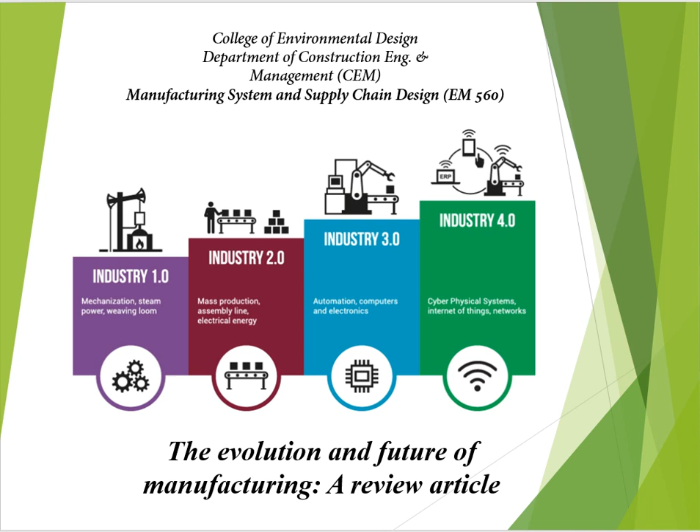Today I'm going to present a review article about the evolution and the future of manufacturing. This article is extracted from Journal of Manufacturing Systems, which was published and available online on 16th of April 2016.

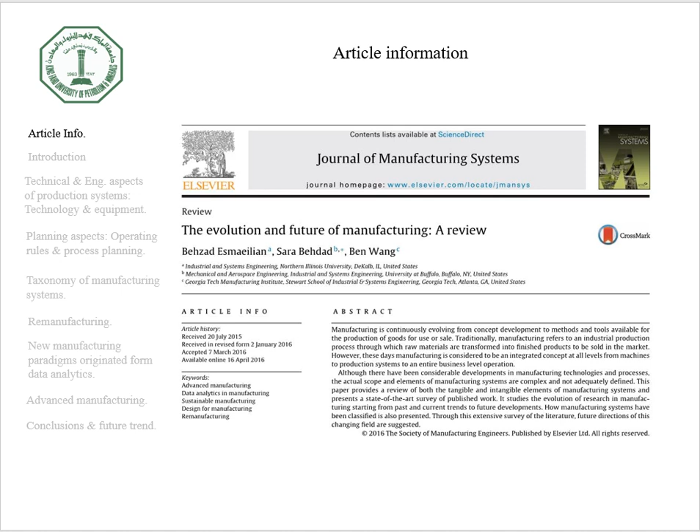As you can see in front of you, the abstract and the keywords for this article. This paper presents a holistic view of manufacturing by analyzing a broad range of publications covering myriad sub-areas and topics.

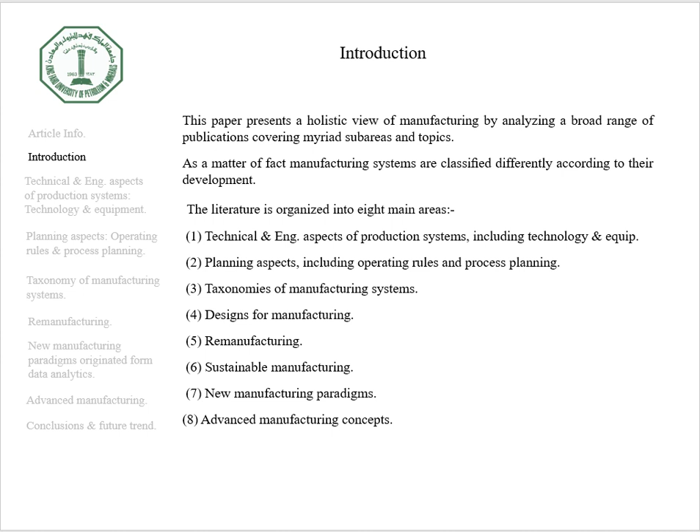This literature is organized into 8 main disciplines. The first discipline is technical and engineering aspects of production systems. The second is the planning aspect. Third, taxonomies of manufacturing systems. Fourth, designs for manufacturing. Fifth, remanufacturing. Then, sustainable manufacturing, new manufacturing paradigms. Lastly, but not the least, advanced manufacturing concepts.

Let's start with the technical and engineering aspects. From manufacturing processes, we have a variety of processes that can be applied to the materials, starting from casting, cutting, forming, and fabrication. Each technology will be applied to the material and to the metal based on its requirement and its desires and its serving functions.

A more comprehensive classification is provided, in which processes are classified into 6 subcategories: casting, machining and finishing, joining, sheet metal, polymer processing, and deformation processes.

We have joining technology, where several parts are joined to form a new part, such as welding and assembly. We have dividing technology, like sawing and disassembly. We have subtractive technology and material removal, such as machining operations and grinding.

We have transformative technology, in which a single work piece is transformed to another one without a change in mass - using heat treatment principles. Then we have additive technology, like for example rapid prototyping, die casting, and injection molding.

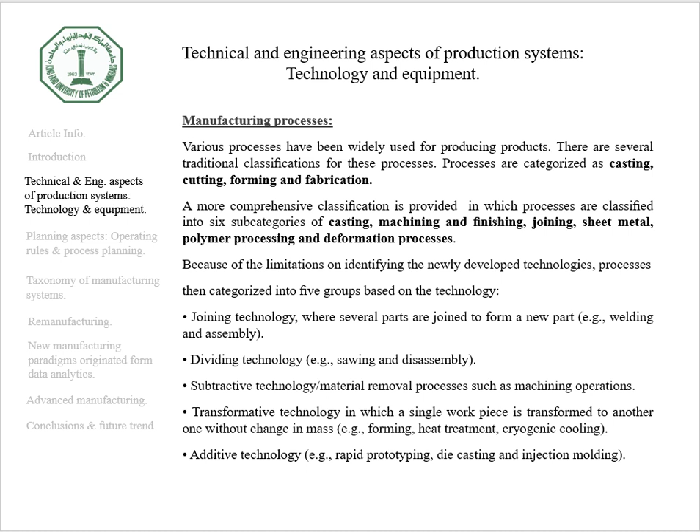From the industrial control systems - the ICS includes and comprises supervisory control and data acquisition (SCADA) system, distributed control system (DCS), small single control devices such as programmable logic controllers (PLCs), sensors, and actuators.

Although the ICS have little similarity to modern IT systems, ICS need different performance and reliability requirements than typical IT systems. So many researchers applied information security related to the ICS, which has also become a focal point. We are going to talk about one terminology, which is resilience.

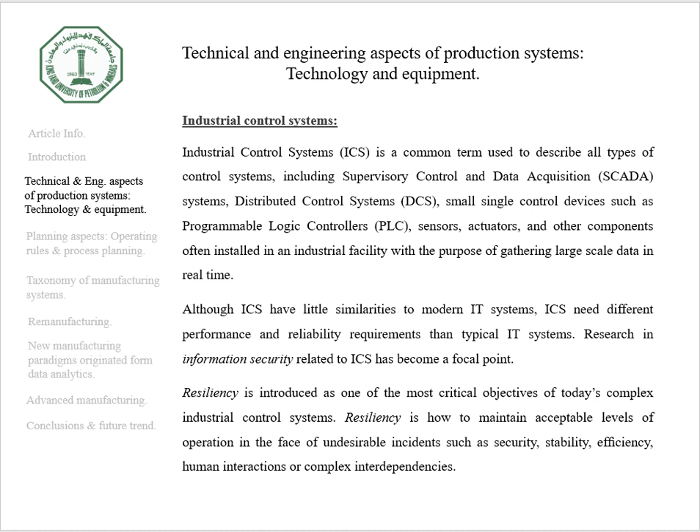Resiliency is introduced as one of the most critical objectives of today's complex industrial control systems. Resilience by its nature is how much a person can resist and overcome burdensome circumstances and survive them. So resilience is how to maintain acceptable levels of operation in the face of undesirable incidents like security, stability, efficiency, and human interactions.

For industrial robotics, we are going to present some features of robots in manufacturing applications. The features of the robots are the ability to quickly, repeatedly, and accurately perform operations, production flexibility, the ability to produce a large product variety, and to avoid the major 3Ds - dirty, dangerous, and difficult jobs - in many applications, such as welding, material handling, painting, and palletizing.

For the material handling system, we know that the cost of material handling consists of 15% to 70% of the total manufacturing cost of the product. And here it became a substantial subject to tackle and to focus on - how are we going to handle the materials, whether the raw materials or the finished goods?

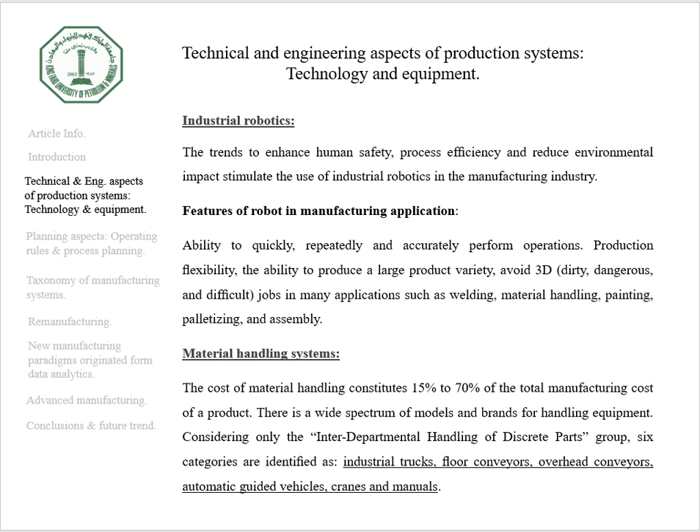So we have various technologies and methods to handle these materials, such as industrial trucks, floor conveyors, overhead conveyors, automatic guided vehicles, cranes, and manual handling.

For storage and warehouse management systems (WMS), we also have automated storage and retrieval systems, called ASRS. This was initiated in the late 1970s and its development continued over the years. ASRS is a typical application of automation technology in modern logistics.

Currently, there are joint applications for RFID, the radio frequency identification technology, and lean manufacturing, which can result in saving the total warehouse operation time by 87%.

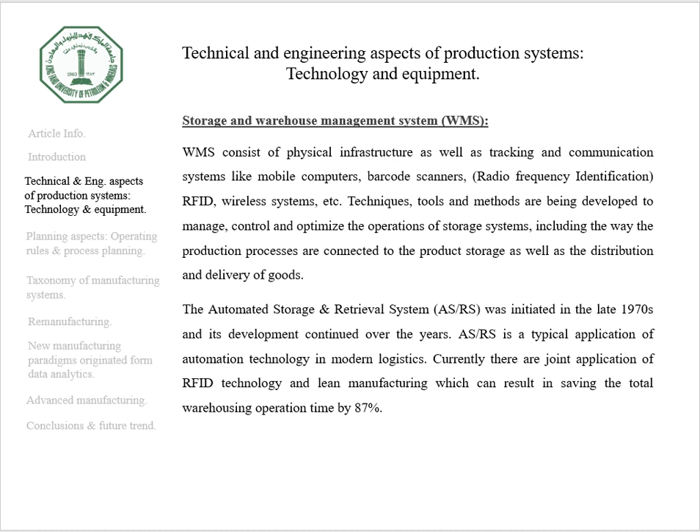The second aspect was the planning aspect. So the operating rules and process planning aspects of production systems are desired under the following main categories: production inventory, scheduling and shop floor assignment, and quality control.

Now let's talk about production inventory and resource planning. There are actually two challenges in this area. The first one is the uncertainty in demand, which all firms face in their work. The second thing is the variability in the manufacturing system.

Regarding the uncertainty in demand, simulation methods and so many applications and algorithms are used to expect or anticipate the demand in the future or coming years.

The second thing was the variability in the manufacturing system. So there are plenty of concepts in manufacturing systems, such as just-in-time (JIT), manufacturing resource planning (MRP2), enterprise resource planning (ERP), lean, and agile manufacturing systems. These systems are applied in manufacturing firms based on the nature of the business.

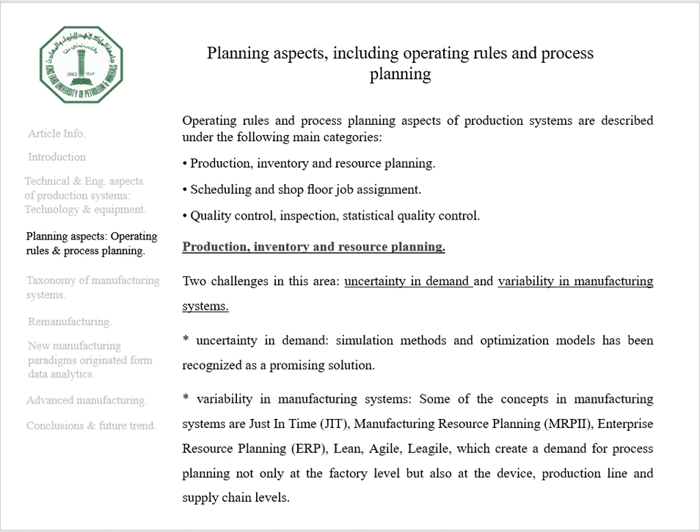For scheduling and shop floor assignments, we have sequencing of jobs and lot sizing. In sequencing of jobs, we have parallel machine scheduling (PMS) and flow shop scheduling (FSS).

Now, on the other side, we have lot sizing - the economic lot sizing and scheduling problems based on the continuous time model, and capacitated lot sizing based on discrete time models. The main purpose in lot sizing is to determine the lot size and sequence of the lots while minimizing setup and inventory costs.

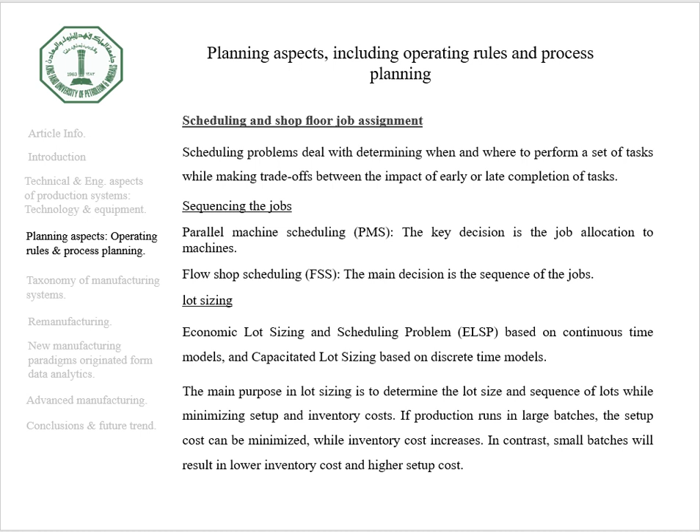Now, the third aspect is the taxonomy of manufacturing systems. In the taxonomy of manufacturing systems, we have the technology perspective and the production philosophy perspective.

From the technology perspective, the recent technologies nowadays adopted and followed by many manufacturing firms are CNC, the computerized numerical control machining, CAM, computer-aided manufacturing, and CIM, computer integrated manufacturing. From the production philosophy perspective, the manufacturing systems are recognized as lean manufacturing, agile manufacturing, and lean-agile.

I'm going here to elaborate to some extent the difference and to distinguish between lean manufacturing, agile manufacturing, and lean-agile. First, the lean manufacturing.

Lean manufacturing is concentrated on eliminating waste, non-value added activities, as much as possible, such as transportation, inventory, motion, and waiting time. So the main focus of lean manufacturing is to increase efficiency, minimize waste, and at the same time use the just-in-time strategy.

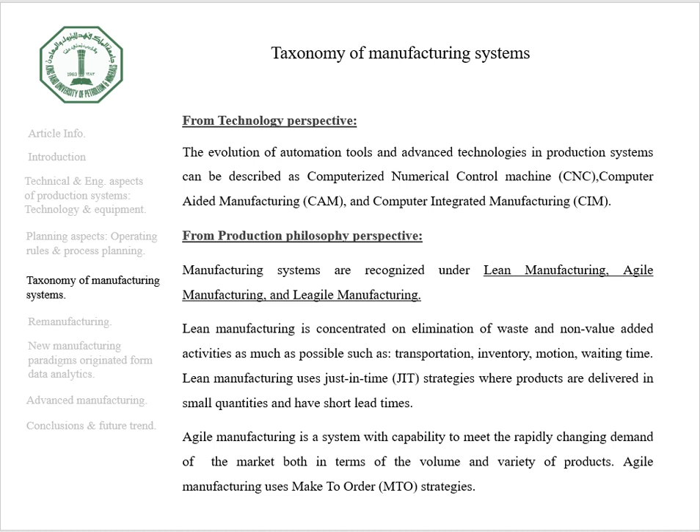Now, lean-agile is actually a hybrid system, or you can say a hybrid strategy. Some firms will start with lean manufacturing, and at some point they shift to be agile. We call this lean-agile.

But the point here is that the upstream, which is the producer, from the decoupling point, is forecast-driven at expected demand, in which it acts based on the lean concept. So the upstream will adopt lean manufacturing first.

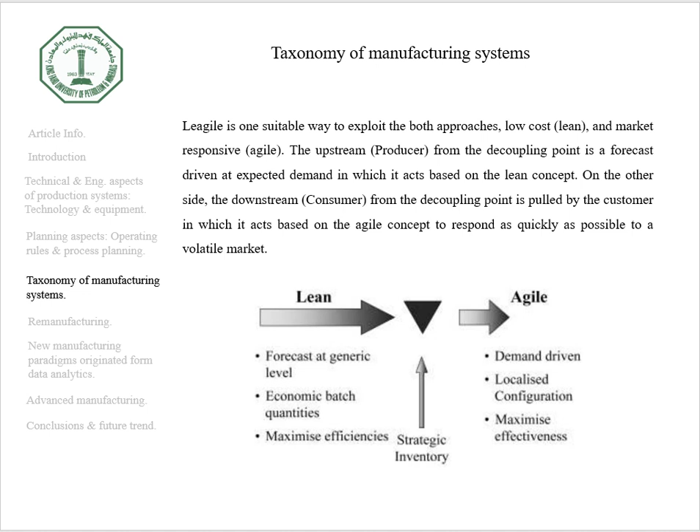Then, on the other hand, the downstream will be the consumer. The consumer will be agile. So the decoupling point here is pulled by the customer, in which it acts as an agile concept to respond as quickly as possible to the volatile market.

From the inventory and control perspective, we have also some strategies in production adopted by manufacturing firms, such as engineer-to-order up to make-to-stock.

Here we can see the responsiveness rate. It will be very low in case of engineer-to-order, but on the other side it will be high in customization. In contrast, for the make-to-stock strategy, the responsiveness rate is very high, while customization is very low. So you cannot customize your product in case of make-to-stock, because it will be available in the inventory and you just go and pick up your finished good or product.

While in engineer-to-order, you are going to have various and plenty of meetings and discussions between the customer and the manufacturer, because you are going to customize and custom-build your equipment or product.

Now, from production control strategies, we said we have a push system, a pull system, and a hybrid push-pull system. In the pull system, parts are pulled from the supplier based on actual demand, and it uses the just-in-time strategy, as we said before, where no inventory exists.

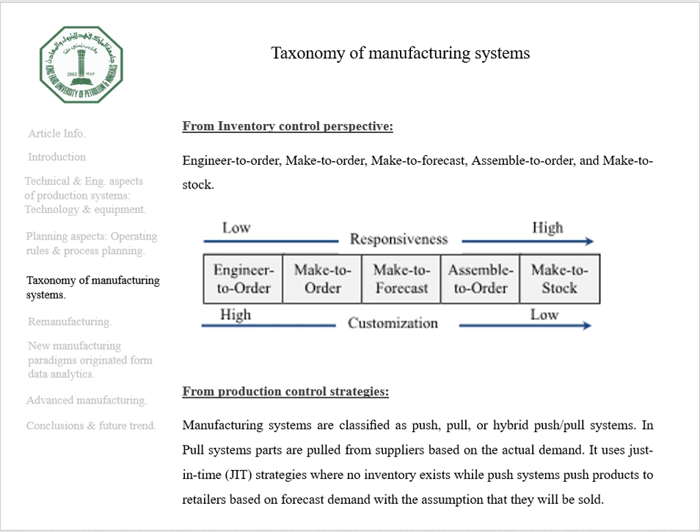Here I'm going to highlight some differences between economy of scale and economy of scope. Actually, the older strategy is economy of scale. Economy of scale refers to savings in cost due to the increase in output produced. So if I produce a high quantity, I'm going to incur lower cost.

Now, the relatively new strategy is economy of scope. The shift here from economy of scale to economy of scope is that you save cost and lower your production cost due to producing two or more distinct products. So you produce plenty of varied products in order to save and lower your cost.

Now, the cost advantage, as we said, for economy of scale, was because of volume, since you produce more quantities and thus incur lower cost. But the cost advantage in economy of scope is due to variety, because you have plenty of brands or types of products.

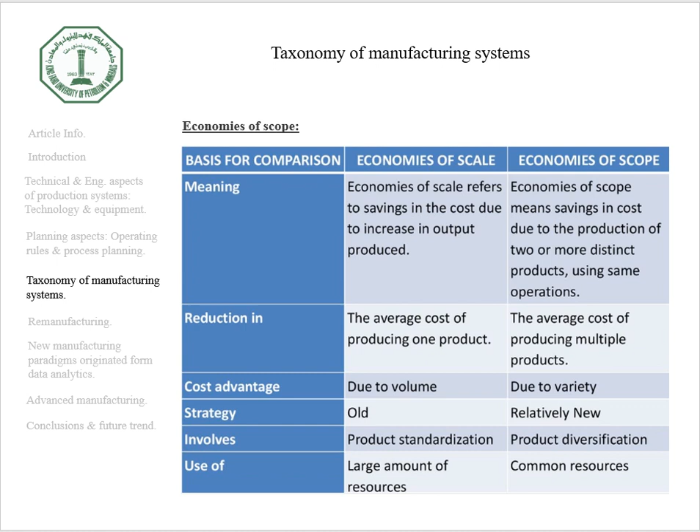Now for the remanufacturing, we can describe it as a process of restoring non-functioning discarded products to like-new performance. You take the expired or non-functioning product and do some modification on it in order to make it like new.

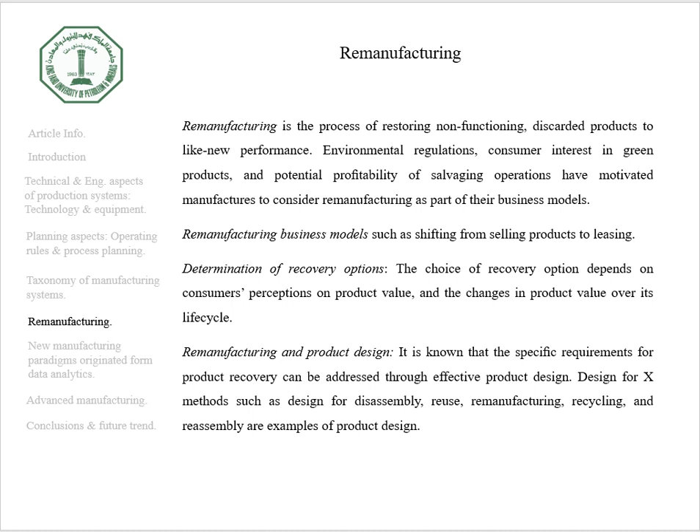In remanufacturing, environmental regulations, consumer interest in green products, and potential profitability of salvaging operations have motivated manufacturers to consider remanufacturing as part of their business models. Many manufacturers now consider remanufacturing due to environmental regulations, reducing waste, and consumer interest in green products—customers sometimes ask specifically for green products.

For the new manufacturing discipline, we have smart manufacturing and smart supply chain. There are plenty of articles about this topic. In summary, advanced manufacturing systems equipped with hundreds of sensors facilitate the collection of huge amounts of data, known as big data, providing opportunities for enhancing manufacturing performance. However, big data technologies are shifting from data collection to data analysis and outcomes.

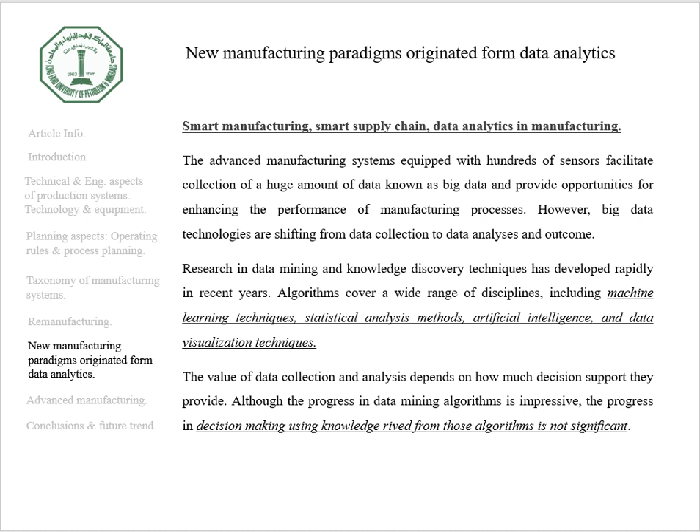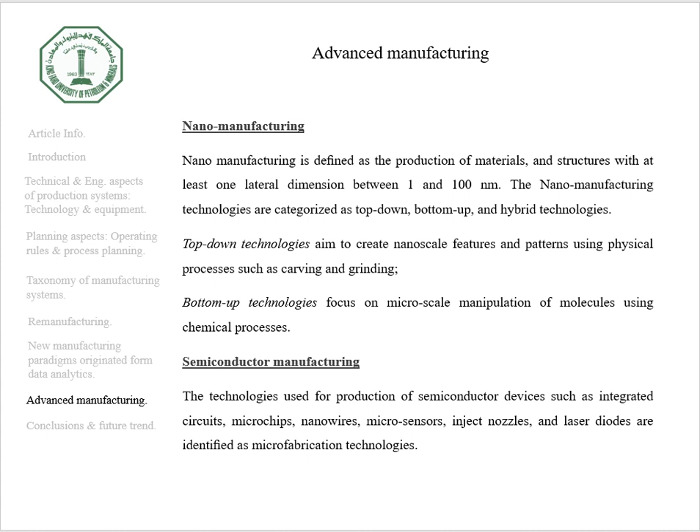For semiconductor manufacturing, the technologies used for production of semiconductor devices such as integrated circuits, microchips, nanowires, microsensors, inject nozzles, and laser diodes are identified as microfabrication technologies.

As a conclusion and future trends, we have directions in the context of manufacturing summarized in 5 criteria: the objective, the business model, emerging technology, advanced scheduling, and enabling factors. The bottom line question is, are all of these concepts adopted in manufacturing firms? In fact, the answer is no—each manufacturing firm follows the practices and principles which comply with its own business nature.

I'm going to tackle now a real example of an HVAC manufacturing firm, to elaborate some of the perspectives that prevail in its production system.

Going back to the manufacturing process aspect, we can realize that multiple processes are applied to the sheet metals such as cutting, bending, welding, and finally painting. Each HVAC finished product has its own distinguished design, so designers shall release the final drawings to the shop floor in order to fabricate the sheet metals complying with the design drawings.